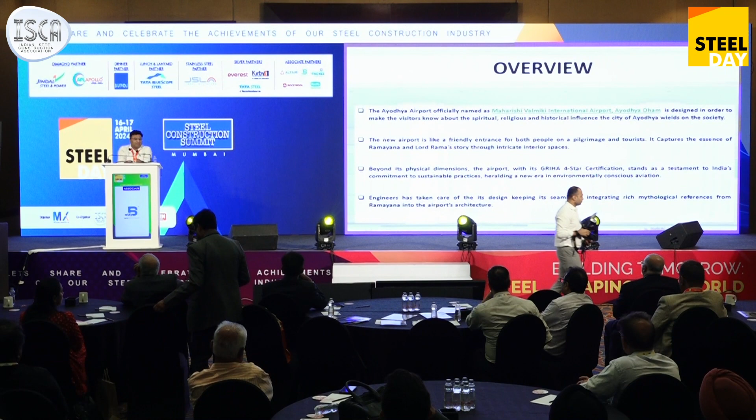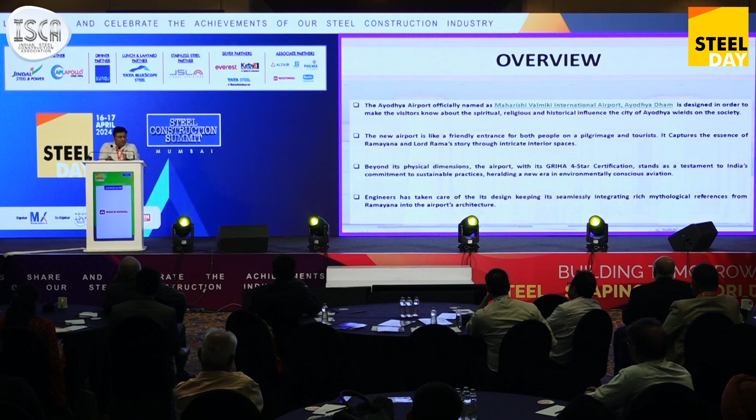And while designing this project, architects have taken care of all the key things, taking the religious things and the holistic approach into account. And while designing this project, we have taken care to make this project as close as possible.

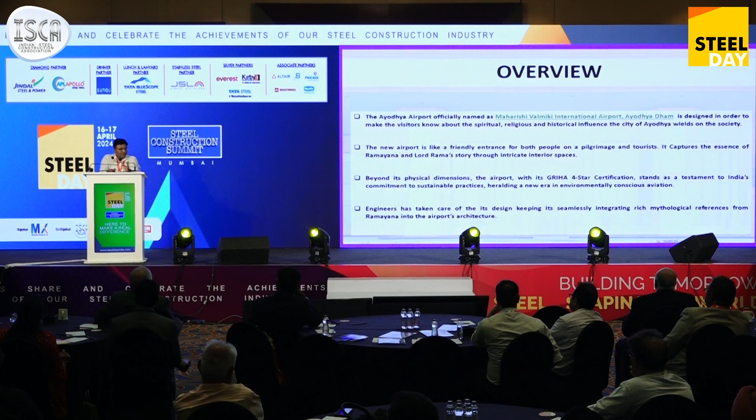So in this airport, if you see, it's a friendly entrance, and when I show the entrance photograph in a later part, you will feel like you are in a mandir. So it's a very good welcome to the pilgrims and the tourists. Whoever feels that they are a tourist, there are a lot of things for them to celebrate, and whoever wants to come and feel like they are coming into a dham, its architecture will look like a temple as well.

Beyond this, it's a GRIHA 4-star certified project. In this, we have taken care about environmental consciousness in the aviation sector as well.

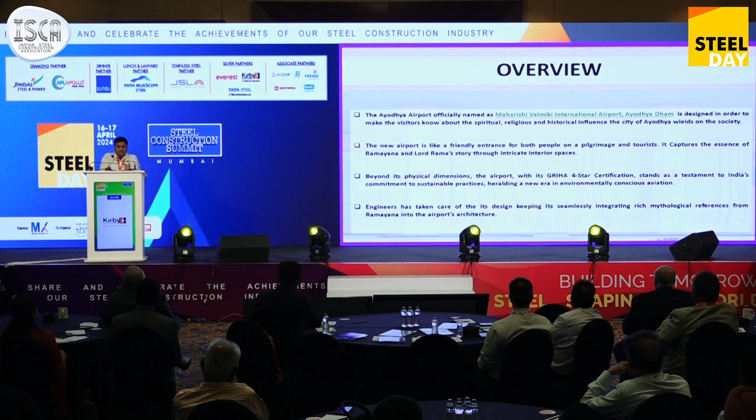About the social and economic impact, as we all know, the part where this airport has come is not very much developed. Even though it is surrounded by the capital city, Lucknow, areas like Sultanpur, Jaunpur, Faizabad, and Ayodhya itself are not that much developed, and the traffic and communication parts, as well as the hospitality part, are not that much developed.

But after this project, we have seen a tremendous surge in opportunities for business there, for tourists, for all sorts of economic activities. And now we have heard that land prices are also increasing. So it signifies that due to the Ram Mandir as well, of course, and because of better connectivity to the city and the surrounding cities, that economic boost has come to that area. So certainly there's a huge social and economic impact after this project.

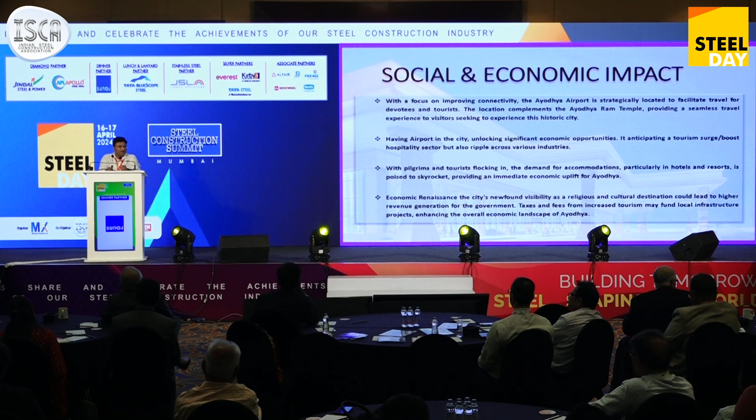So now coming on to the design facts. This terminal building is inspired by the Sri Ram Mandir temple, and in that we have tried to give the colors, the designs, and the shikhars. It's like the temple itself. As far as the terminal building is concerned, it's a two-story building.

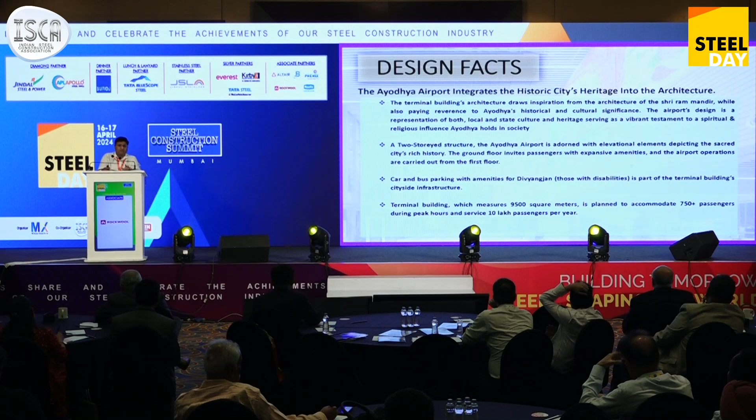It has a platform to welcome people to the arrival part. Another level is the AHU area, the services area, and the third level is the roof. Other than that, there are car parkings, and we have taken care for Divyang people to come into the terminal building, and for the city side infrastructure areas. The capacity of the terminal building is 750 passengers, and 10 lakh passengers a year.

As I told, it looks like a temple. So there are 13 shikhars: one big shikhar, and the remaining 12 shikhars are smaller. The 12 shikhars signify the months of the Hindu calendar, and the shikhar signifies the sun, because Shri Ram was a Suryavanshi. The shikhar is almost 9 to 10 meters in rise individually, and there's brass over it. We adorned it with brass.

The architecture is Nagara style, and the front part of the terminal building has 7 pillars, and these pillars are carved, which signifies the structural blending of cultural richness in the airport architecture.

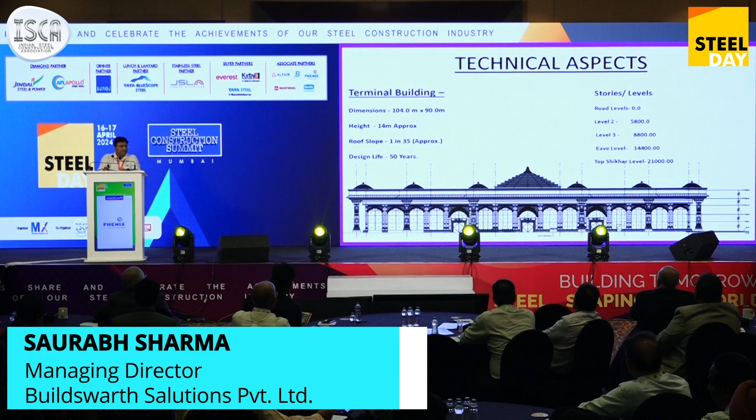So let's come on to the terminal building part. These are the dimensions. The roof is 104 into 90 meters. The clear height is 14 meter approximate. The roof slope is 1:35. Design life 50 years, and in the levels, as I told, we have 2 levels and 1 roof. Shikhar is 21 meter from zero.

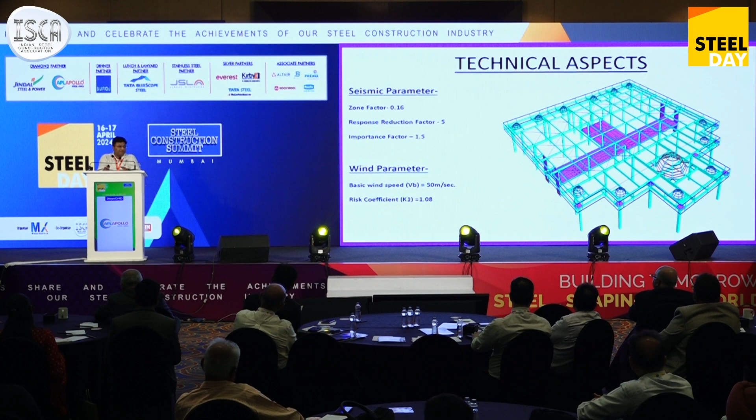Seismic consideration we have considered as per the zone there. Zone factor we have taken 0.16. Response reduction factor 5. Importance factor is an important building. And the wind parameters we have taken 50 meter per second, and the risk coefficient we have calculated for that area is 1.08.

This is a Tekla 3D view of the whole terminal building. You can see the shikhars are modeled in it. They are 13 in numbers. We will definitely see it in a later part too. So in my opinion, while designing this structure, we have faced a few criticalities, which I consider as special features.

One is the 3 to 5 meter cantilever which is holding the GFRC structure. It was a challenge to hold this because the cantilever was 3 to 5 meters, and that linear load as a UDL was definitely a significant one. Shikhar is again a sort of complexity in that. We have used the embedded connectors, which is not that new, but yes, we have considered it in the design. And the trusses of 26 meters, which are holding the brittle element, which is nothing but the GFRC.

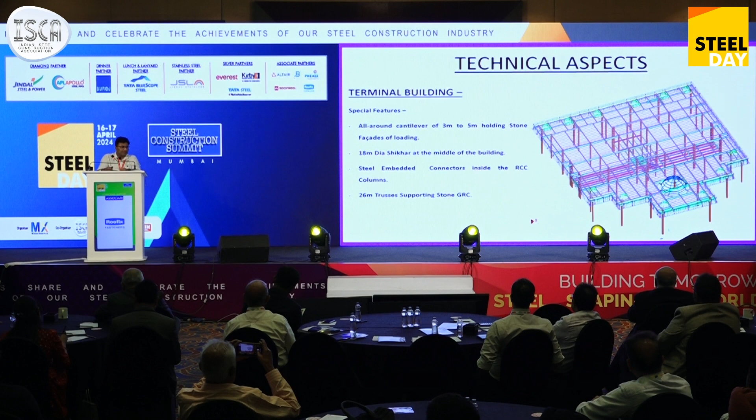So the cantilever part, which I talked about, looked like that. These images are taken from Tekla in order to make the detailing as clear as possible. So in that you can see that the bolts are there, and the cantilevers. That magenta color shape is the shape which is holding that whole GFRC arrangement.

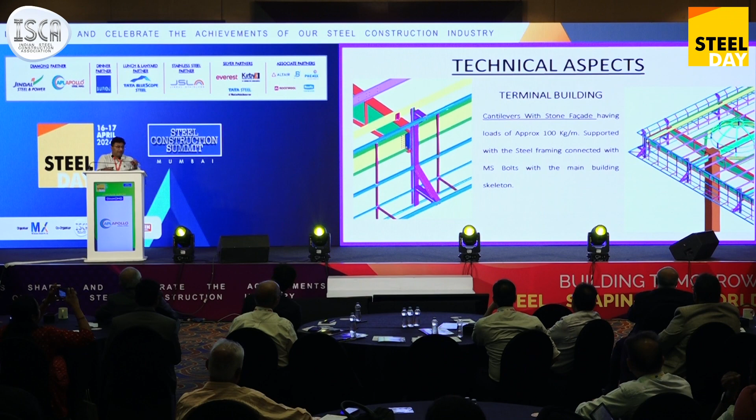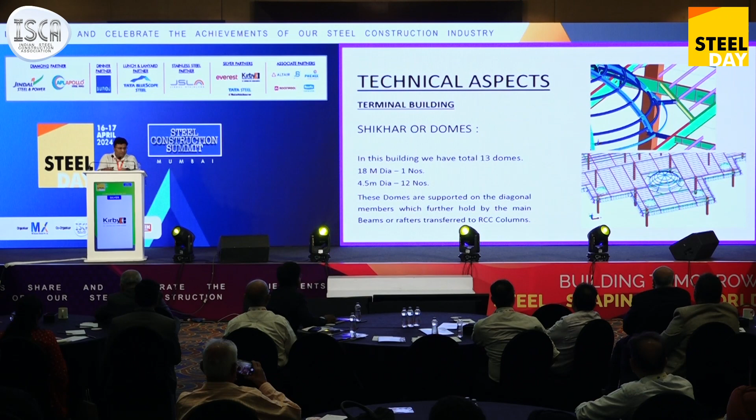This is the shikhar. As I told, total 13 shikhars are there, 12 are smaller in dia, and one is 18 meter dia. Whenever you see any image of the terminal building, you will see the bigger shikhar, which signifies the Surya, as I told. So this is the image of it, and I try to show the connections which we used in it.

This is the embedded part, and that is the most interesting part, I believe, because in our structure the columns are encased columns, and the beams we used are steel beams, so I don't want to take any chances. That's why I took the steel structure into the connector part, and the connectors are having connections all around.

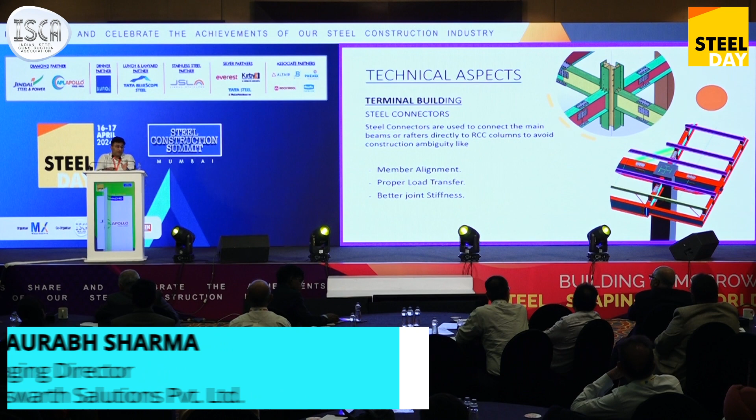So the connectors were implanted before casting the column, and then we casted the RCC column, and the projected part of the connectors was connected to hold the other part. What I feel is that with this arrangement, the member alignment was good, load transfer was good, and we didn't lose any joint stiffness, and we are not uncertain about calculating the joint stiffness, because while designing in software like ETABS and STAAD, we consider such connections as fixed connections, but due to some play between the RCC and the steel plate, we feel that fixity gets somehow loosened.

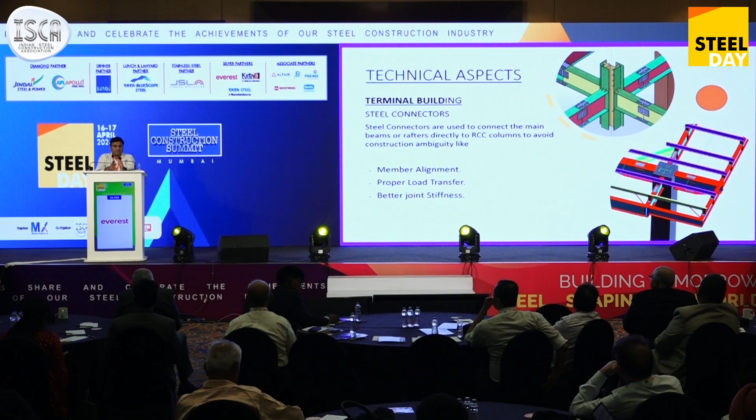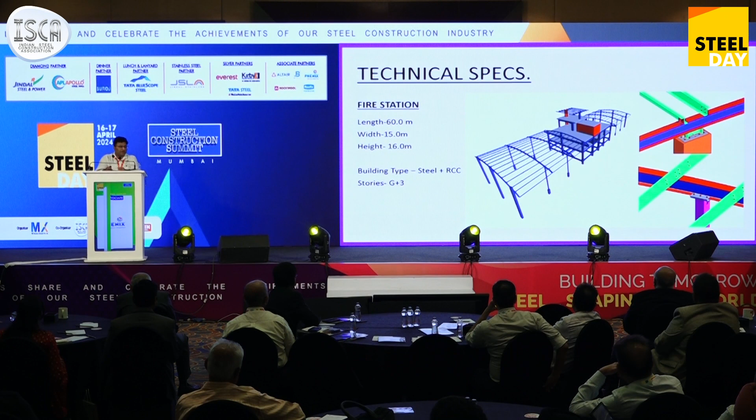ATC building is not that big, but I just want to show the skeleton of it. So this is the fire station building. ATC building, these are real photographs. Substation building. And the gate. This picture was taken 2 or 3 days ago. This gate structure is again surrounded with GFRC, and as I showed you in the previous slides, some magenta color part was there, so it is like that.

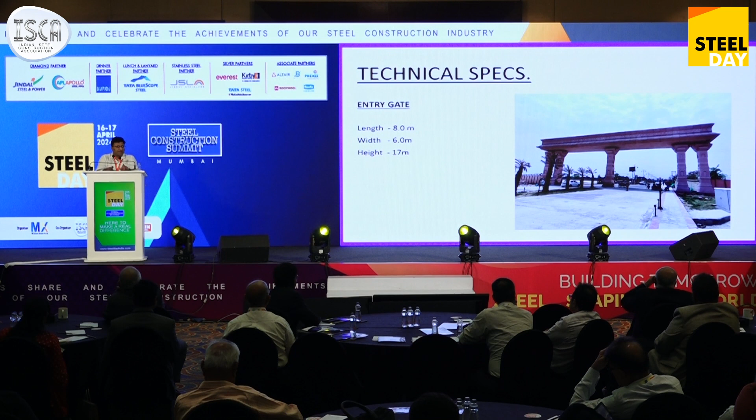1 minute left. What's up? Yeah.